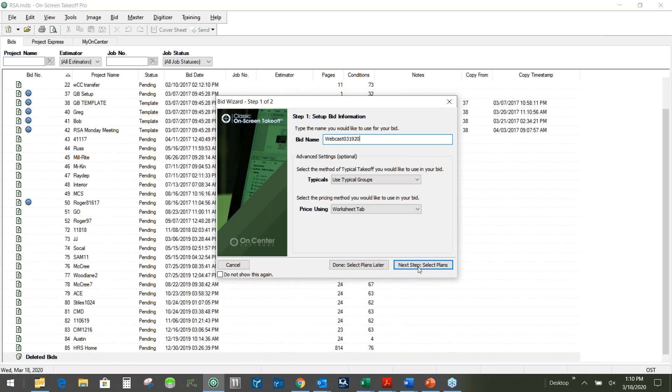So what I'm going to do is pop open OnScreen Takeoff today. I'm going to tell it that I want to create a new bid. There are a lot of different ways to use the program and a lot of things you can do. I'm just going to give you some examples today that I think are going to be really helpful for you to understand, but it certainly doesn't cover everything in full detail, which is why we provide some pretty extensive training for it as well. But what I'm going to do is give this a bid name, and I'm going to go select a set of plans.

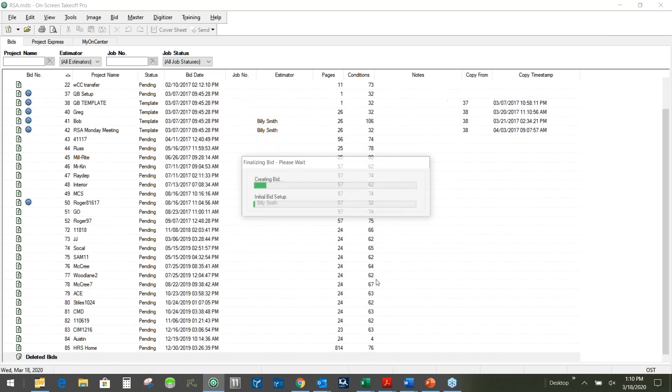So here, from the set of plans, I'm going to go to a folder where I have some PDF documents, and I'm going to go find something that would work for us today. Holiday Inn, that would probably work. So what I'm going to do is import all of these PDF files and convert them to TIFF files. The reason I want to do that is I want to be able to move super, super fast around the screen without any kind of delay. Sometimes PDFs and stuff can be a little bit sluggish.

So a little bit about the interface. The biggest portion of the screen is actually where I'm going to do the takeoff in.

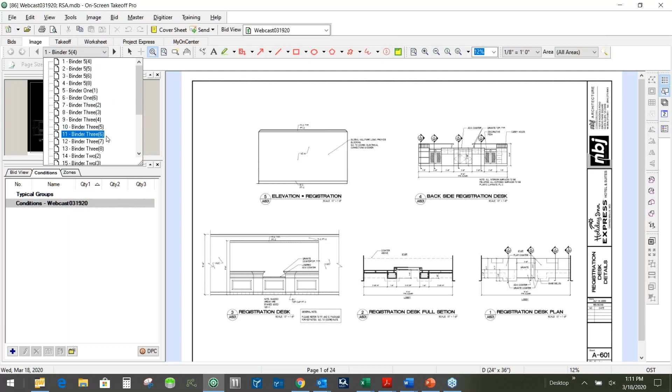So if I wanted to look at this, we'll see here are all the different pages that we have as part of this. I'll just go select one so you'll see how easy it is to change. Now I'm at a page here called Elevations, or whatever number of pages you have for that.

In the upper left-hand corner, it's going to show me the amount of zoom. So for example, if I zoomed into this exercise room, it would allow me, utilizing the tool in this upper left-hand corner, to be able to pan as fast as I want. Please understand that just because of bandwidth, your screen can't update at the same speed that I can move. But if we're only going to get 1 out of 10, we want to be able to go fast for it, so hopefully you understand that.

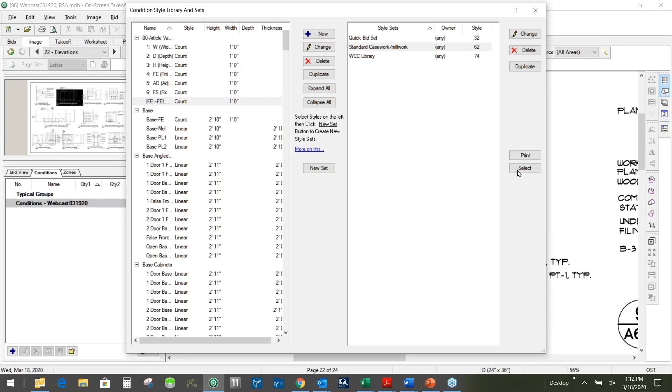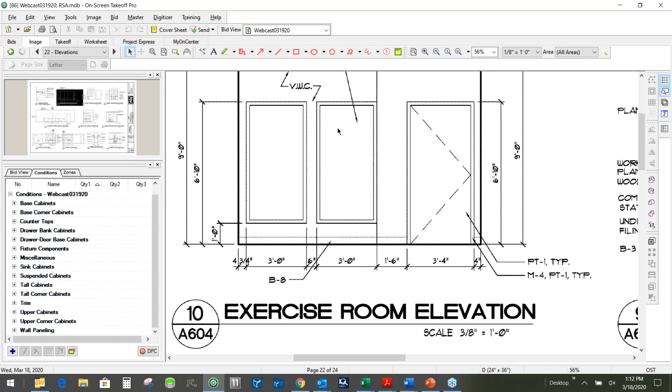In the bottom left-hand corner of the screen is going to show me what it is we're working on. What I'm going to do is insert a style set, and we have created for this industry a style set of conditions broken up by a lot of different things, from base cabinets to corner cabinets to tops, drawer banks, door drawers, fixtures, sink cabinets, talls, walls. Just a huge amount of things that we provide with the software itself when we're quoting, which makes it really fast and easy to get right to work.

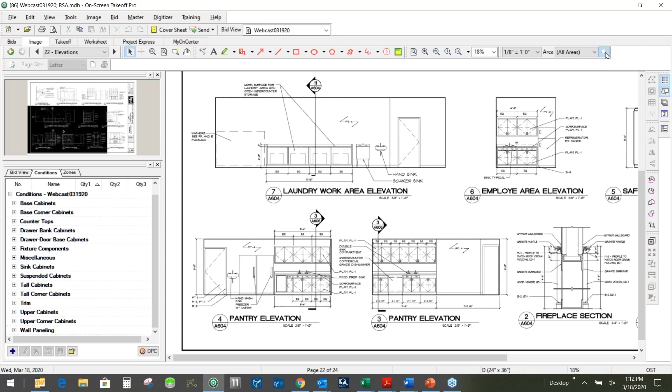So what I want to do for the moment is show you a few things about OnScreen Takeoff as we go. One of those is that it's possible to manage areas. For many of our customers, they actually break up a bid into multiple locations, especially if it's a commercial project - it might be a hospital, a school, something like that. And so they don't want just all of the conditions and totals for the overall project; they actually want to be able to break it out.

So in this case, I'm going to call an area Pantry 1, because I see we're dealing with that, and I'll say Pantry 2 for a second breakup. I'll add another one here just so that we see that now we've broken this up into 3 separate areas for our bid, and that's nice and easy enough to work with. I'm going to zoom in a little bit just so you've got an easier view of these elevations we're working on.

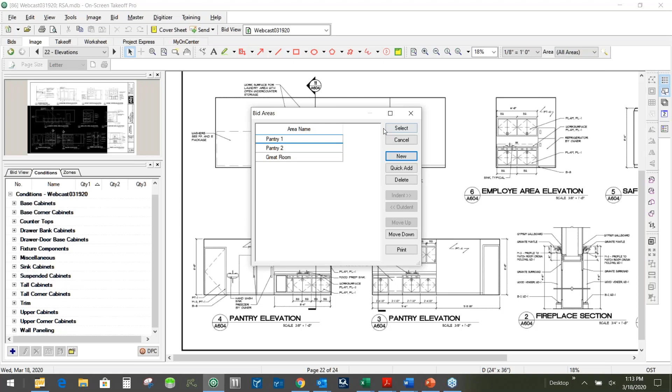From this, we have easily the ability to perform the takeoff that we might need. What I'm going to do is select directly from the conditions that we have, and start doing takeoff. In the case of what we're working on today, I'm going to select a linear condition to do this. By the way, you might notice that there's scaling for this, so I'm just going to set it at 3/8 inch equals 1 foot, which is where it is.

I'm going to select on this and say, hey, I want to be able to take this off. So now, in one swipe, I've been able to count exactly what we're doing. I'm actually going to do this across both elevations. Notice I had a 1 door at the end, and I want to deal with it a little bit differently.

By the way, you can take or treat each condition the way that you want for them to be. I could adjust this and say I want it to be a certain size or the way that I want it to work. I'm actually just marking up the drawing. If you want it to appear as circles or diamonds, if you want it to fill the whole space, it's totally up to you, however you might want that to work.

So I'm going to notice that I do have some one door, one drawer that I want to be able to work on, so I'm going to select this. I'm also going to say, hey, I've got some two door, two drawer that I want to work with. And you might decide you want to make yours so you'd have a separate sink base or whatever it is that you might want to do, but it's completely in your control, however you might want it to work.

So I'm going to take a little bit more of that off here, and I'm going to tell this that I've got some two door, one drawer that I need to be able to take off here and here. Got a dishwasher there.

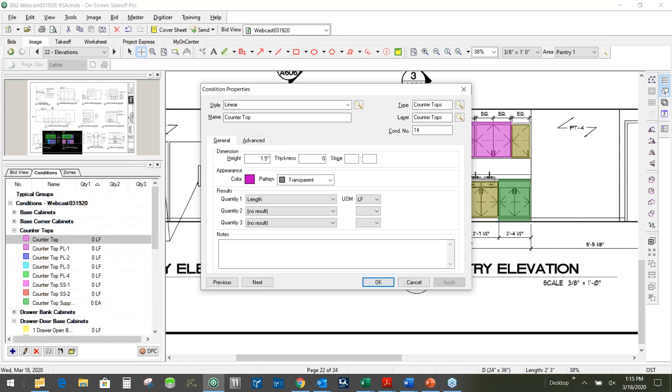So now, if you follow me, if we looked at all areas, everything would be turned on. If we looked at Pantry 1, only Pantry 1 is turned on. If we looked at Pantry 2, that is turned on. So it's a really great way to be able to take the data and parse it out, not only from the view on screen, but if you'll notice, that also now is separating my data so I know the exact amounts that I'm taking off for each of those areas.

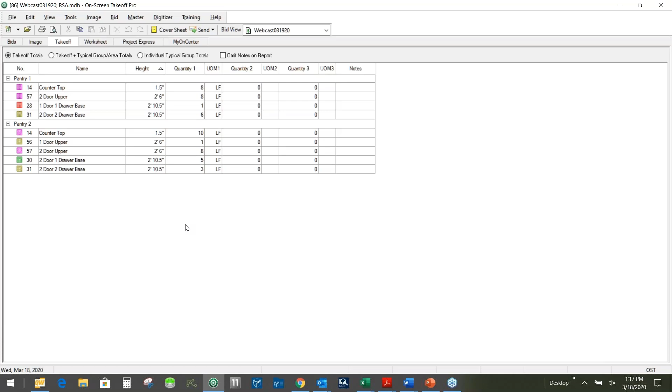What my plan is today, if I don't mess anything else up, is to actually show you how to go from this quantitative takeoff that we did, this light amount of work that we've done, how to get that over into the estimation spreadsheet to be able to arrive at the commercial values, to generate the BOMs and reports, all the things that we need to be able to make a report, and show you around it a little bit. And then I'm going to come back to on-screen takeoff, and we'll do some more complex takeoff of other things, whether that's die walls, moldings around rooms, wall panel systems, all of that kind of stuff.

So while we're here in the takeoff tab, I'm going to actually take this and say that I want to be able to export this file. And so I'm just going to drop this on the desktop, and I'm going to call this Webcast, and we will say OK to this. So now I'm going to pop open our estimation spreadsheet. This is an incredible spreadsheet.

Maybe you've got your own, and we can help integrate to yours as well, but this spreadsheet has hundreds and hundreds of thousands of man hours likely built into it. It does some amazing things. I'm just going to click on Import CSV, and so now I'm going to go to my desktop, and I'm going to go select this webcast. And so now you'll see that it just populated all these things and used the areas that we defined for this before.

So if I scroll to the right on this, what you'll see is that, by the way, I just showed an example of taking off in a lineal fashion. Some of our customers take off each cabinet. Some of our customers do lineal and then count fronts and finished ends. It's just really flexible how you can use it. In this case, we have a quantity 1 that happens to be the linear feet for this.

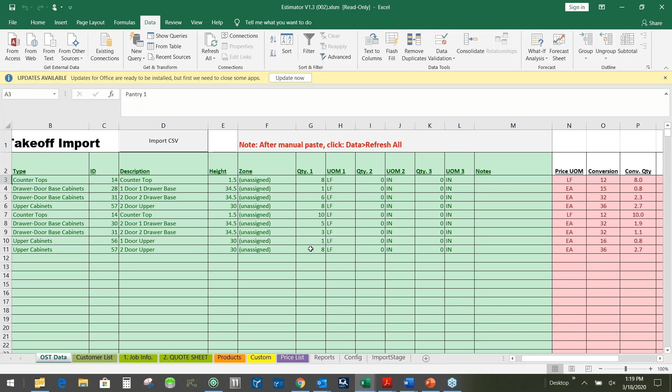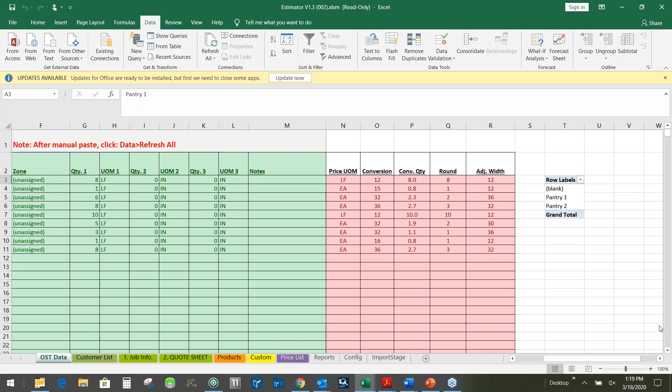We're actually doing some auto magic on this data, and we're taking it in and we're actually making conversions for the data to be able to calculate to the proper amount of cases to be able to get the materials as accurate as possible. So it's really nice that it's doing those kinds of things for us automatically.

Now, when we go look at this, we might want to look at the quote sheet and to be able to see that just from doing this, we came up with a price for this literally on the fly. And so that was really nice that we can say, hey, you know what, this is a really cool thing that we have it built this way, but maybe there's some things that I want to change about this.

Maybe from the job information, I want to say, hey, pantry 1 is not going to be a PLAM 1, it's going to be a PLAM 2. And the pantry area for this, I'm going to call this a cherry. Just as an example, I could even go further into this and define specifically the way that I want. Maybe on this PLAM 2, I don't want the case edges to be 0.5 millimeter. I want them to be 3 millimeter, or I want to come over and tell this that it's a different kind of a drawer box.

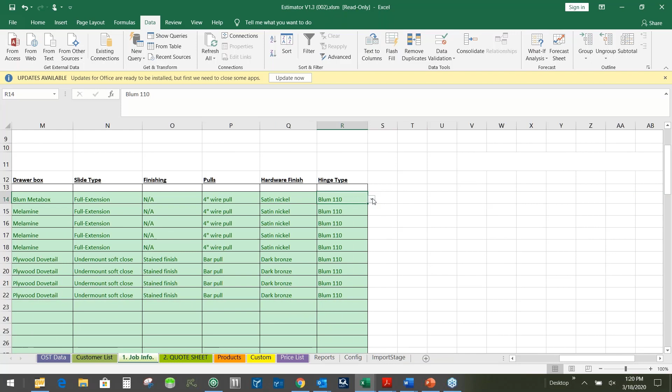I got a Metabox that's going into this, or maybe the hardware, whatever types of hinges that I might want to be able to use. In this case, I needed to go to some 5-knuckle hinges. So you're able to define what specification groups are in each area, and then you could subdefine those individual settings for those specification groups. And what does that do? It changes the quote. And so now we have a different thing that has completely different values.

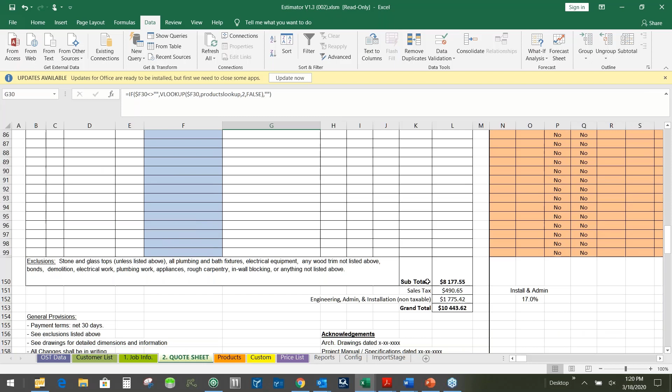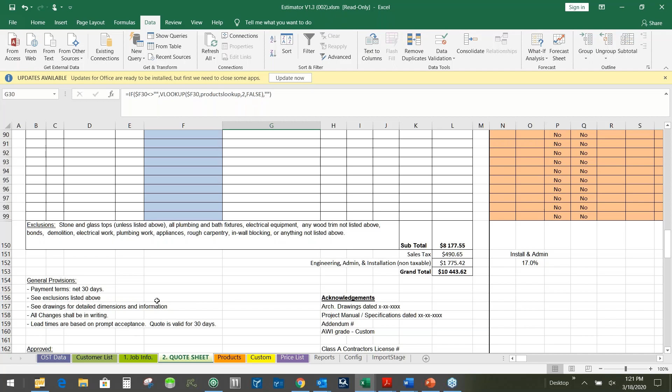Of course, this being a spreadsheet the way that it is, I can print this, I can make it have whatever general provisions, acknowledgments, exclusions, whatever you might want on your bid. But the point is that we got this really, really fast, just directly from the output of the Takeoff.

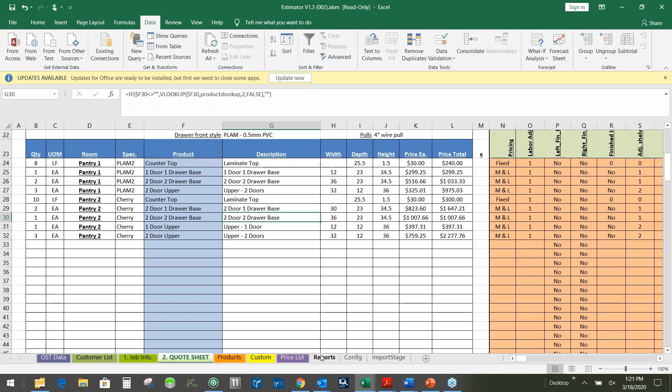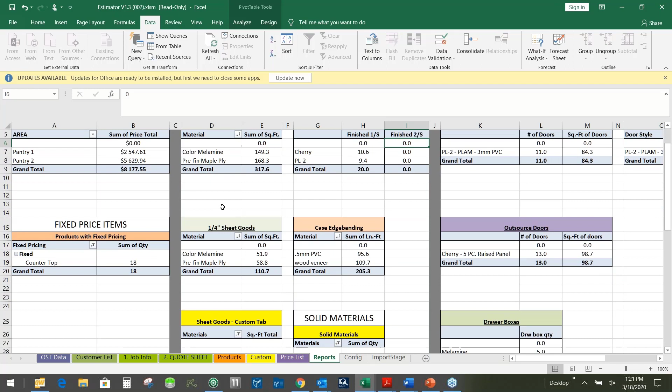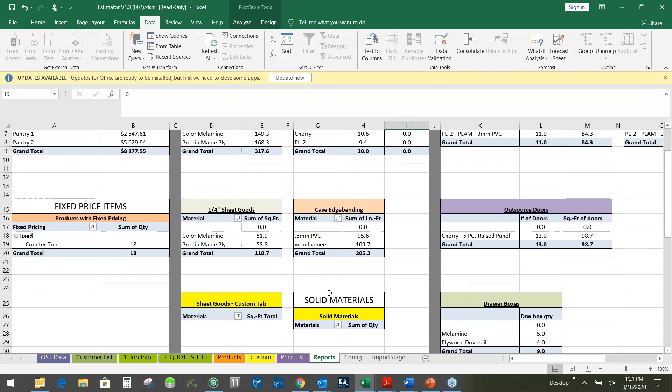This also gives me the ability, if I wanted, to look at this from a reporting standpoint. And so I could literally say, hey, I want to refresh my data, and I've just calculated out the sum of price of all of these things. I have now calculated out the material. I now know the sum of square feet of the fixed price items, of the sheet goods, the edge banding, the drawer boxes. All of those kinds of things are calculated for us, not just the quantitative values, not just the commercial values, but also giving us a BOM directly from the Takeoff. So I think that that's pretty awesome.

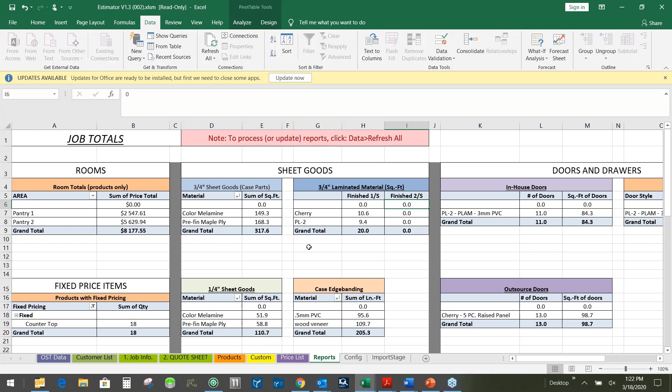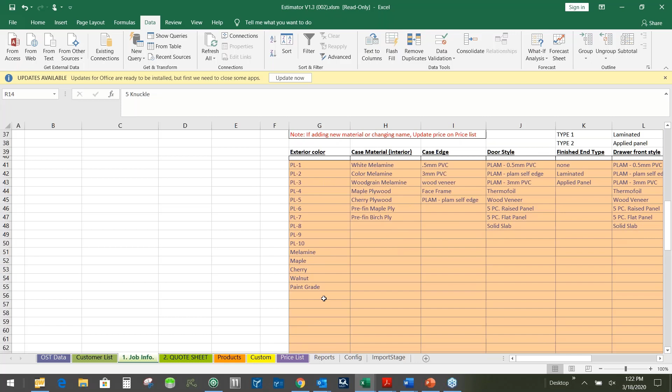Before I move back into OnScreen Takeoff, I just want to walk you through each tab. You have the ability, of course, to add whatever number of customers. We went through the job information a little bit related to specifications, but of course there's even more editable and different ways that you can add even more types of spec groups to this. The quote sheet itself is, of course, completely alterable. It's just bringing data from other places, but you can make it look the way you want.

If I went here and said, hey, I want to look at the way that this would print, you can have this so that the appearance is going to be exactly the way that you want yours broken up. Some of our customers want to see line item information, but no prices per line item and only prices per area, or maybe we only want to display areas and sub prices. Any of those kinds of things can all be done for you. So it just really depends on what it is that you want to have for this.

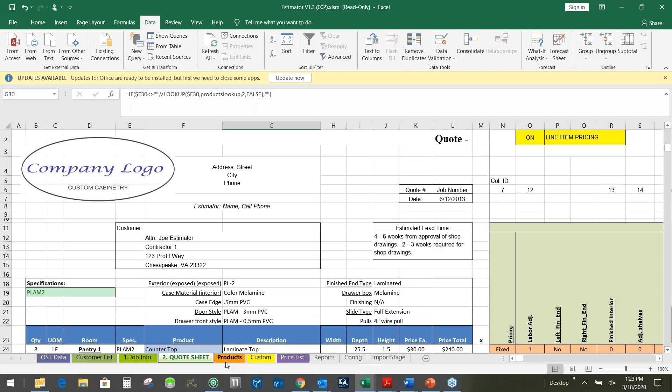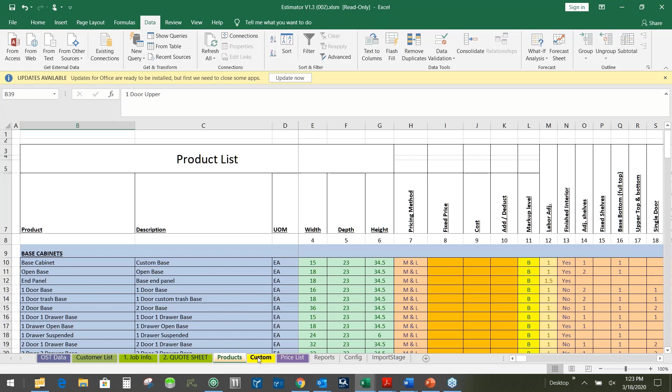From the product standpoint, we built a huge number of products within this that is doing pricing for us, and our markup levels, labor adjustments, all this kind of stuff. And of course, you can add as many of these products as you want so that it can automatically calculate for you. If we look at this from the custom standpoint, being able to take this information and apply different values for solid materials, for hardware, for labor, all of that can be adjusted exactly the way that you want it to be.

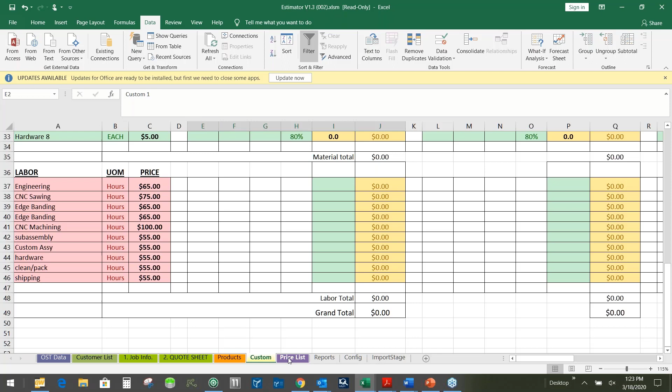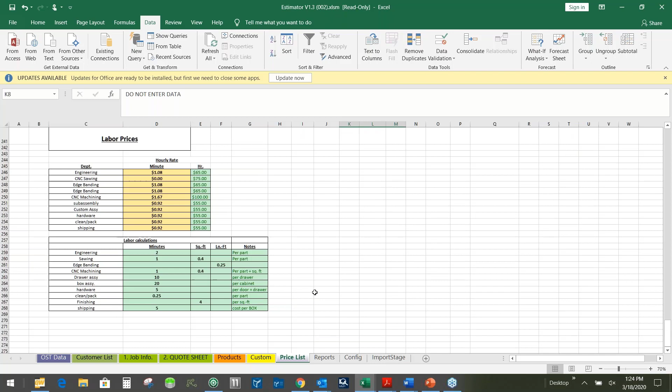Also, a very complex set. We've already applied numbers, but for how you might want to apply different things, even all the way to, once we get past all the drawer slides, engineering labor, CNC, edge band, sub-assemblies, assembly, hardware, clean, pack, pickup, all that can be done for you to be able to calculate. And then the configuration file is just where you want files to be dropped from OnScreen so that we can automatically pick those up. So that's just a little bit of an example of what we're doing in the estimation spreadsheet.

And I want to use the remainder of our time to focus on OnScreen. But I want to stop for just a moment and check out what questions we have. So give me just a second to read what we've got going on.

Yeah, so I just wanted to answer this one in a good way. The question is about non-cabinetry kinds of items. I just want to point out that OnScreen Takeoff can be used for almost any construction-related situation. There are over 30,000 customers of OnScreen Takeoff throughout the United States, whether that's people doing landscaping, roofs, sheetrock, metal buildings, swimming pools, anything that you might need to take off in order to come up with a bid, it works great for you.

We're doing a project right now with a customer who's utilizing our estimation spreadsheet that has been completely customized for the types of things that they do to service the restaurant industry. You might imagine that in that case there are range hoods and appliances and cooler systems and freezers and all kinds of stuff that might go into this.

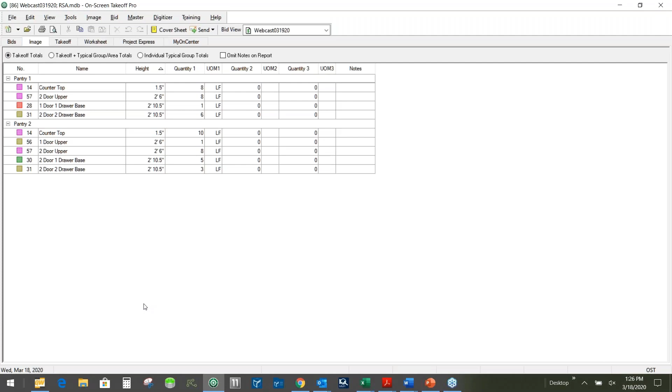So I'm going to go back over to the image of this for just a moment, and notice that we did do a little bit of takeoff here in the pantry area of this. I happen to notice that we had another type area here that I'm going to use as an example as well. Matter of fact, I'm going to zoom into it just a little bit more, and we'll use this. And this is an example in an exercise room that's actually going to help us understand how we could do something a little bit more complex off the beat of just standard cabinets and countertops.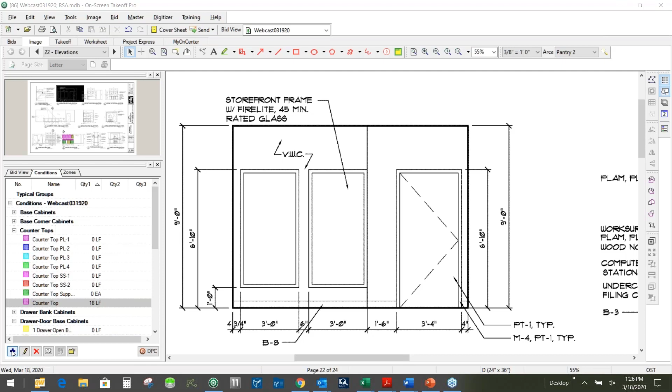And what I'm going to do is I'm going to say that I want to actually do some takeoff of something, and I'm going to call this wall paneling. So I'm going to make a brand new condition. I'm going to tell this that I want it to be a type area. Notice that it could be linear, area, count, attachment, a typical group. In this case, I'm going to make it an area. I'm going to give it a color if we want here.

I'm going to tell it for unit of measure that I do want to know the square footage, but I also want to know the perimeter, which is going to tell me the calculations for the quirks or molding. And I'm going to also tell it that I want to be able to see a tile count of how many panels that I'm working with. I'm going to move over here to the advanced area and tell it that I want to make a grid, and I want the grid to be 3 foot by 4 foot, and I want this to have a 3/4 inch quirk. And so now I have all of this information.

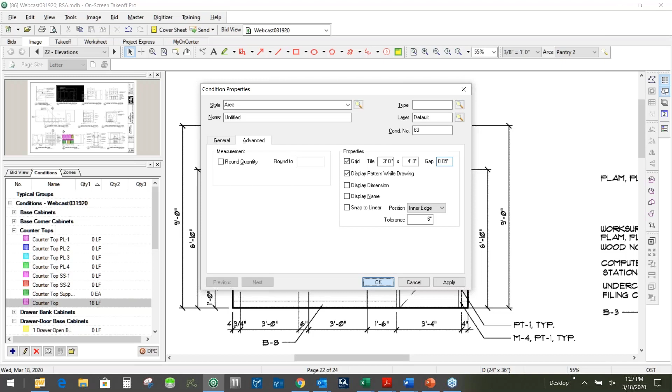So now what am I ready to do? I'm literally going to take this, and I'm going to tell this that I want to start building this, and I'm going to back out around this doorway. And so now I have created this wall paneling. While I'm here, I'm going to use a command to do a backout mode. And I'm literally going to take this right around this window and this window. So now what I'm telling the calculation is don't count the data that would have resided inside of this area. I want it to be calculated separate.

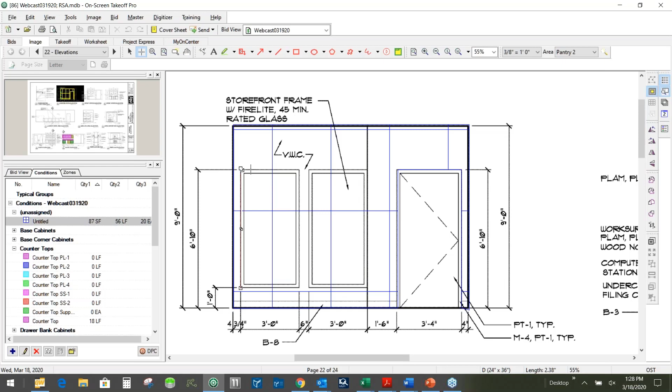So now if I wanted, I could even take this data that I have, and I could tell this that I want to adjust the way that it's going to work. Almost here. So I have now a data set that says that I have 52 square feet, I have 92 lineal feet, and I have 20 as my count of panels.

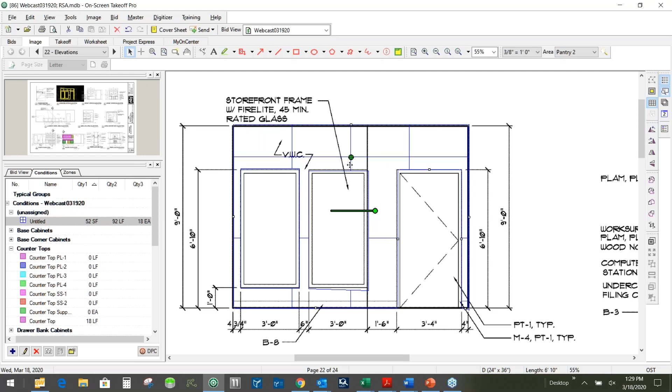I'm going to grab this. And so now I'm going to tell this grid, just so that you can see what's happening, that I want to be able to make an adjustment. Grab this. So now I can even adjust the panels themselves. So maybe I like it to look like this. And what you'll see as a result of this is that I'm actually changing the actual tile count that I have in it. So from 20 to 18. And so I'm getting this as close as I can. I'm not engineering it, but I'm getting it to where I really have some amazing data within it.

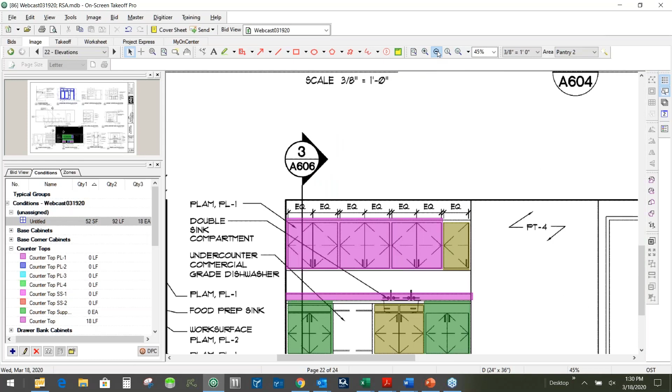I'm also going to move over and let's look at something from a floor plan. The reason I want to do this is that not all takeoff is done from an elevation. Actually, let me flip back here and show you something real cool first. We were back here in these elevations, and one thing that I'm going to add to this that I think will be pretty cool for you to see is I'm going to tell this that I actually want to create a named view, and I'm not going to do a lot of typing, so I'm just going to tell this that I want it to be a P1, and I'm going to tell this to be a P2.

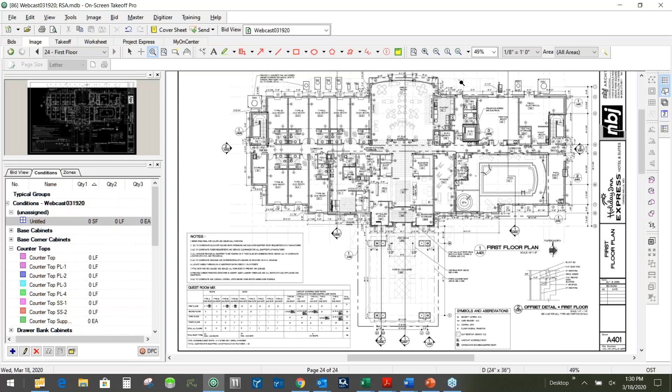So what that's going to do is allow me to, even though I did my takeoff in the elevation, link it to a floor plan. And so here I'm going to come and zoom into this great room area, and here's my pantry right over here. I can literally say, hey, I want to be able to add a hot link to this, and this is going to be my P2, and I want to add one that is my P1. And so now I have a link to my elevation.

So what does that mean? That means that if I wanted, I could just literally click a button and be able to see directly from the floor plan what was taken off in another view. In this case, it happens to be the elevations themselves. So pretty cool to be able to do that.

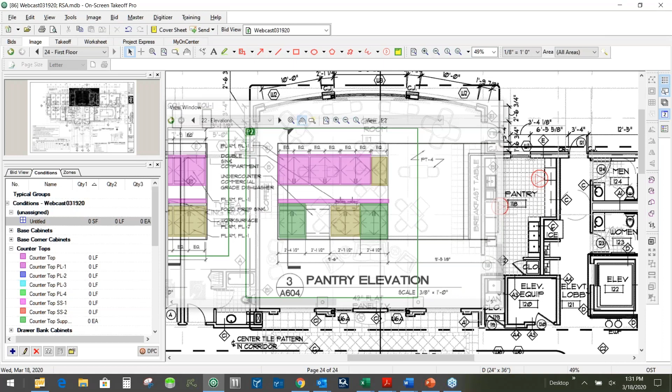Sometimes we're going to need to do things on the fly. I'm just going to tell this that I want this to be linear. I'm going to call this a granite surface.

And I'm going to tell this that I want this to be a certain size. I could tell this that I want it to be a particular color. I could tell it that I want it to have a certain shape or whatever it is that I want to do. And so now I have the ability to take this, and just in a matter of seconds inside of this area, now I've taken off 2 granite bars.

Now let's do another type of condition. In this case, we'll make this one linear, and I'm going to call this crown. If I could type. And I'm going to tell this that I want it to have a particular size. I'm going to tell this how I want it to take off, and so we'll say, okay, 0.7. Okay, so now I'm going to start right here. I'm going to do takeoff through here, up to here, here, here.

So what you'll see that's appearing on screen is that I am counting, and by the way, I could count all the segments of this as well. And so now I'm going to take one across here. I'm going to tell this that I want to set it as a curved segment. I'm going to take this and actually bend it, and it's actually going to calculate its lineal footage based on the arc itself. So I now know that I've got 114 lineal feet of this crown that I'm doing.

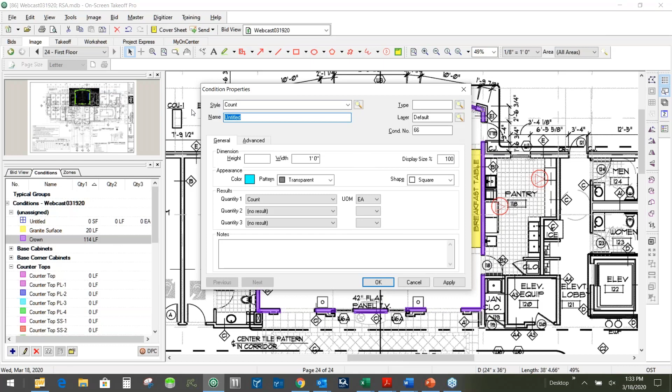I also have the ability, in this case, maybe I want to do something, let's do a count, and I'm just going to tell this that I want to call this a top, and in this case, I'm going to tell this that I want this to be a diamond, and let's give this a color itself. Let's work with this. So it means you could actually, within your own company, have your own strategy, just being able to know from the view of this what's a base, what's a tall, what's a wall, what's a door drawer, any of those kind of things.

So if you want, it's also really quick to be able to count and to be able to see that you've marked up things the way that you want them to be. I might make a decision and say, I really wish I wouldn't have made that quite as small as I did. I want that to be this particular size, and so now it's changed. So I can see that they've all been marked up. Any way that you want to be able to utilize this, we can work with you to make this a really, really super great experience.

I'm going to go back over and look and see what we might have in the way of questions. Bear with me a second. Okay.

I'm not going to answer pricing questions too much. I will tell you it's really cost effective. I'll tell you that implementation of it is super fast. Most of the time you're able to start doing some amount of takeoff the day you get it. But we do usually recommend a couple of 3-hour sessions to train you on and give you strategy for utilizing on-screen takeoff, as well as being able to understand how to use the tools within the spreadsheet itself.

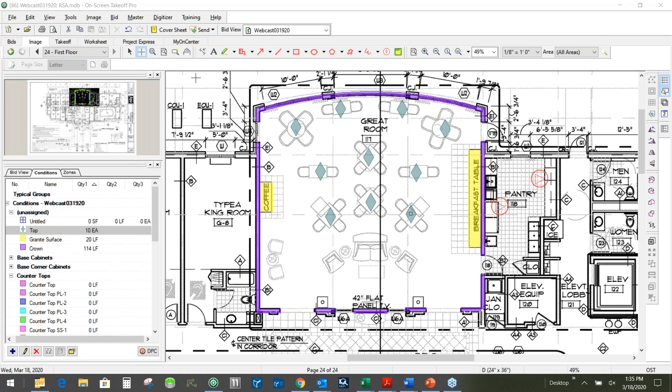So get back here. But I don't really have anything else from a question standpoint. It's meant to be educational. I certainly allow a lot of time for answering questions themselves. I try to cover, at least at the basic level, some of the things that I know my customers care about. One that I think you should probably be aware of is that it's pretty common for customers who are doing projects to have situations where they're getting bid changes or drawing changes along the way.

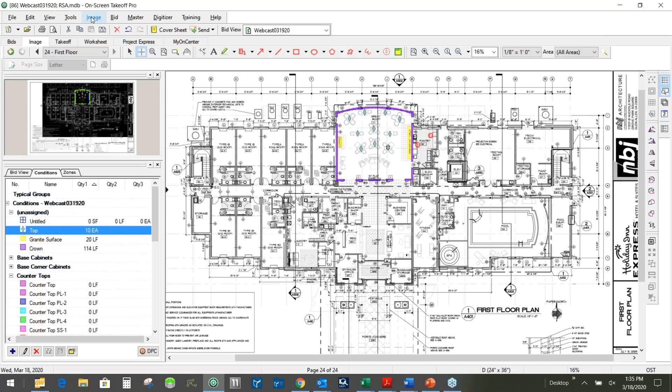It's really powerful that it allows you to bring in an overlay. And so you would have the ability to go select an overlay image. I'm not sure that I have anything as a great example of this, but let's see what we can do here. The main point, I think, for you to understand is that you have the ability to lay in a new drawing, and it will display for you any changes to it. And so it can make it really nice instead of having to rely on bubbles or clouds and all that kind of stuff.

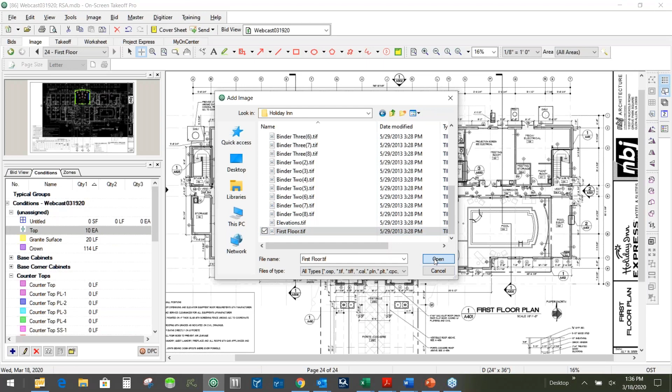Let's look at this. So now you'll see what's happened is that it's going to overlay a blue over a red, which is going to contrast the purple and allow me to see any differences in a glaring way. If I made an adjustment to this, let me see if I can do this. I'm going to align the overlay image just because I want to move it off of where it needs to go.

I want to align this. Let me do that. There we go. So it's displaying for me to show me if there's any changes whatsoever that have been made to this drawing so that I don't have to worry about getting it right.

I'll tell you a quick story. Sometimes stories are the best way to communicate things. Had a customer that got saved by On-Screen Takeoff, had a bunch of notes, let's call it A through Z, whatever it is. We can see we got notes in the bottom left-hand corner of this. And he got changes in a drawing, and it had some clouds on it, so he thought he was good and safe, made his adjustments. However, On-Screen Takeoff flagged that the text had changed. It's seeing that pixelization and anything different about it.

As a result, guess what the note was? Locks on all cabinet doors. What if you missed a simple note like locks on all cabinet doors? Let's suppose for a moment that we didn't catch it. We bid the project. We won the project. Probably by mistake. We get the project, we produce the project, we install the project, and when they come to inspect, they discover that we don't have locks on all the cabinet doors.

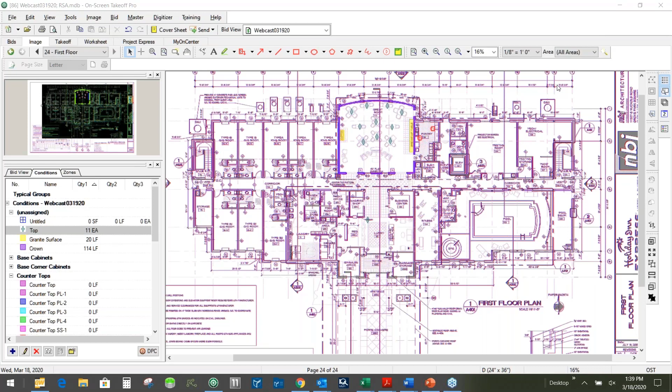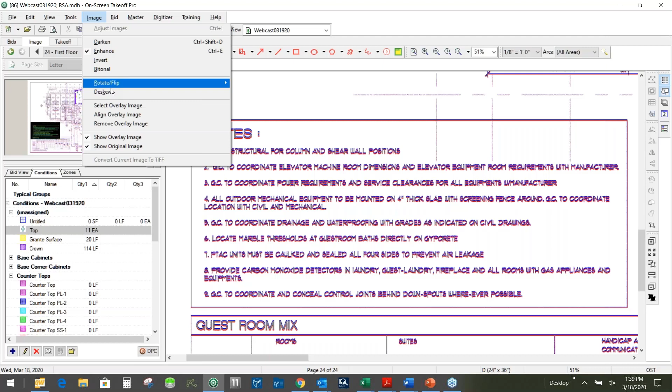Not only is it part of the drawing itself, but also part of any of the bullet side of this. So I'm going to zoom in on these notes and give you an example. Even though my overlay didn't have anything different, it's still displaying for me what is the difference. What is the difference between the text of it? So if I went here to the image and I said, turn this off, I'm now only seeing this. If I want to be able to see the overlay image and not see the original, if I want to be able to see them both.

And so it's giving me a great fast way to be able to see if there's been any changes whatsoever that are occurring inside of any of the drawings, whether that be the actual layouts or the text itself.

What else do we have? I don't want to make it overcomplicated. I don't want to hold you longer than necessary. I just want this to be a good experience for you, and want to make it a good thing. Anybody else have a question that we could cover today?